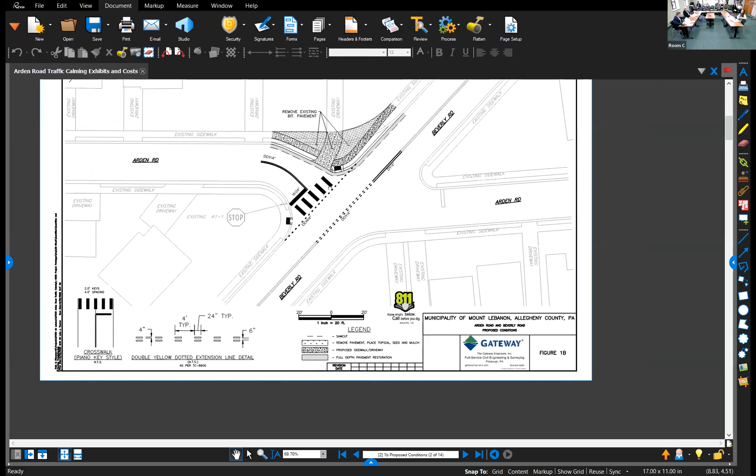We had this a little narrower and tighter originally when we met with Public Works. There were questions and concerns about garbage trucks and plow trucks going straight across, and that they would just cut over the curb like some other issues we saw on Sleepy Hollow years back. So this version is modified — we had just two narrow 12-foot lanes at the bottom, and we've added some feet so that right at the throat it's a bit wider, but still creates the need for a right turn.

At the top, this is the priciest part because there's sidewalk, driveway extension, curb, removal of some things, and a bit of pavement along the edge. Our opinion of probable cost for this is $65,000. Looking back at the Hoodridge and Rockwood project, I believe that one was about $65,000 to $70,000 — that also included some brick restoration, but that was three to four years ago, and costs are way up since then.

That's kind of an all-in estimate — we'd have to get some survey work done and do some design, so there's a bit of engineering and survey fee in there as well. For the sidewalk piece, it would be in the right of way, but maintained by the resident. Essentially throughout the municipality, sidewalks adjacent to the streets in front of houses are in Mount Lebanon's right of way, but as with every other case, it's the homeowner's responsibility to shovel and maintain it, as was the case with Hoodridge and Rockwood.

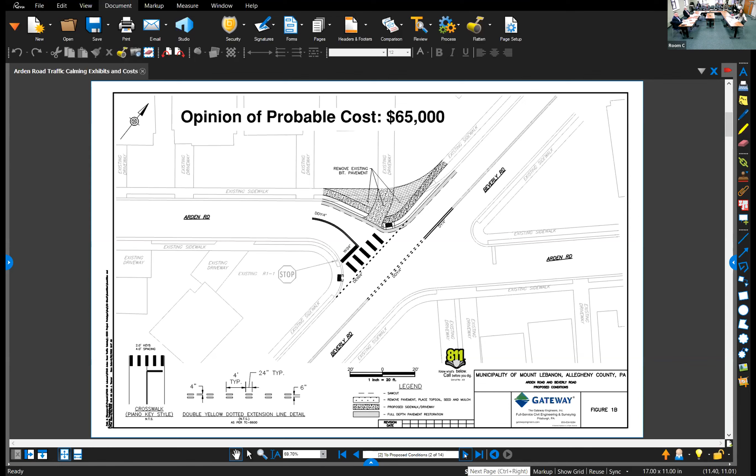So we proceed west on Arden up the hill. We get through the all-way stop sign with North Meadowcroft. And then we get to this section, which you should obviously know where this is. It's like mid-block between Overlook and the next one. Particularly including the house numbers, really - yeah, this really spells it out for you. It's like putting a puzzle together. But it's actually in front of right around 287 Arden Road.

So this is just your standard speed hump that you've seen in other places throughout the municipality that's being installed. Typical hump, it's 12 feet long, it's a parabola, it's not a bump like you would see in a parking lot at a mall. You can travel about 15 miles per hour over them comfortably. They're marked with signs and pavement markings.

We have to find areas where we've got roadway grades less than 8%, which we have here. You want it to be not in front of somebody's driveway, so with the driveways on each side, the spacing, we had to find a location where we weren't going to be impacting people's driveways, and also make sure the drainage would work. So this was a real good spot for it.

This was the location that was presented to the traffic board and to the neighborhood. That didn't really have any comments as far as the location. They were all pretty good, but it's pretty much midway between those two blocks.

So if you follow me from the beginning, we're slowing you down on the right turn, making that a little bit more uncomfortable for you. Then you try to gun it. And yeah, then you got the speed hump. Yeah, right, okay. Then you speed up and then you slow down at the speed hump, then you speed up again.

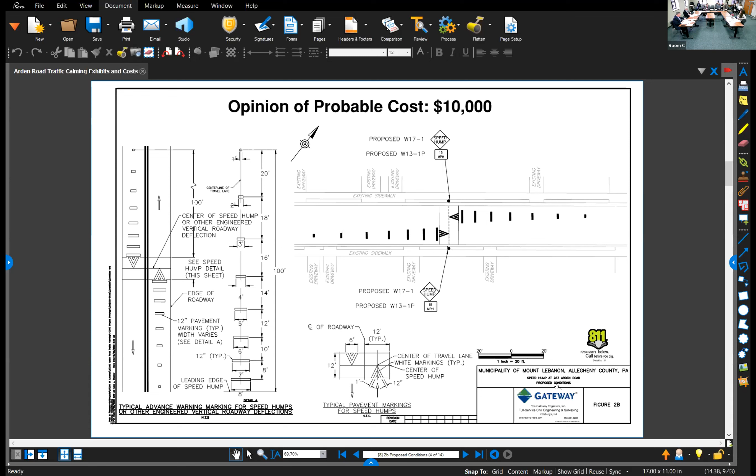That takes us to this kind of offset Overlook Drive Arden intersection. It might not be coming through on here in the existing conditions, but the alignment of it and the width internally between here is about 30 feet wide curb to curb. Once you get down further to the south towards the business district, it's your standard 22 or 24 foot wide. Same thing when you get up to the north. So there's actually a little bit of a skew in here on Overlook. It's not a straight through shot, and it's pretty wide in between these two crosswalks, and curb to curb is about 30 feet.

This isn't an all-way stop, but the stop signs are on the outsides. So if you're coming northbound on Overlook and you stop and you want to continue straight through, when you get to the northern side of Arden, you don't have another stop sign there. You're essentially navigating through the intersection. Same thing if you're using Arden as that cut through, you would have to kind of do a little bit of a jog through the intersection there.

This is manned with a crossing guard, a person with a crossing guard, during school hours. My understanding is that the crossing happens in the middle here, so kind of in that middle no man's land where you don't have a stop sign once you're in the intersection. But essentially it's worked well. This isn't a marked crossing, but that's where the crossing takes place.

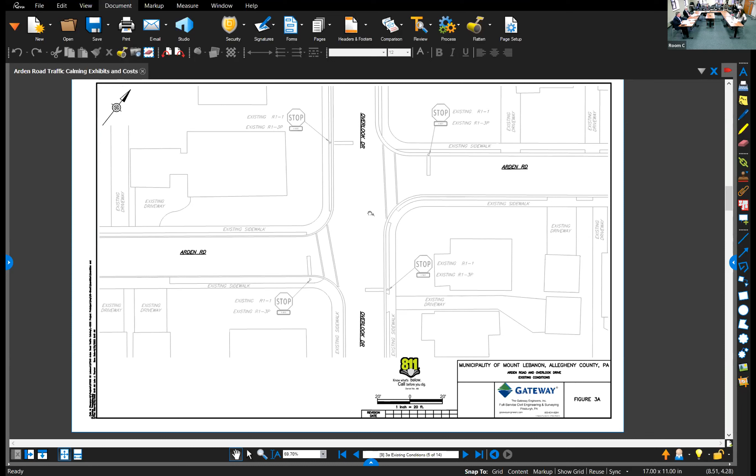This is one of the ones that we did a pretty significant modification to from the plan that was presented to the traffic board and the neighborhood.

We were originally trying to put in a concrete island in the middle as a refuge area, to take up some of that wide space and to delineate, to force more of a left turn and a right turn. Because what we saw on the video and data collection is that people were coming up, rolling through the stop sign at an angle and then shooting straight across at a 45-degree angle, and vice versa.

So they're not really making turns or making the movements, and it's in an area that's pretty heavily traveled with pedestrians, especially students. They're trying to avoid the lights on Beverly, trying to get from Cochrane to Beverly or vice versa. So they're taking every shortcut they can.

We're trying to impede them a little bit and calm them. And this is close to a business district—I know most of you know that. Beverly's right there, the business district just to the south of the screen here.

So instead of that, what we're proposing is to essentially create the same thing with markings—yellow markings, white markings, piano key crosswalk markings, dash double line markings. If you're in a vehicle, visually you're going to see where those dash double yellow lines take you, and ideally you're going to follow that. If you think about other areas where you have lots of asphalt and pavement, but you have pavement markings, you don't typically see people cruising right through the middle of them. They typically like to follow the lines that are on the road for them.

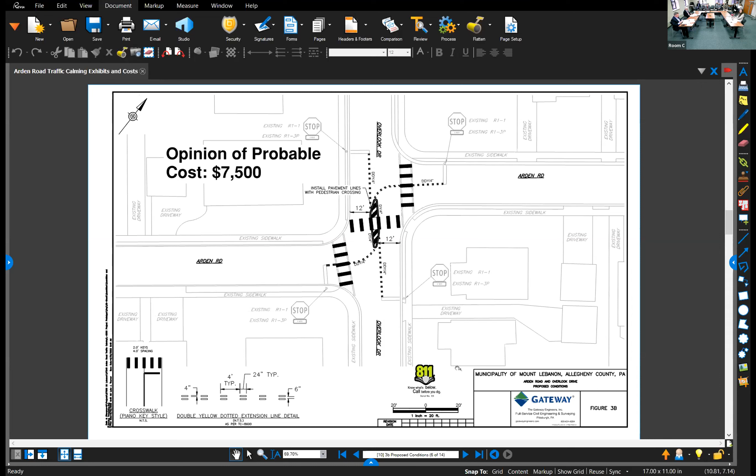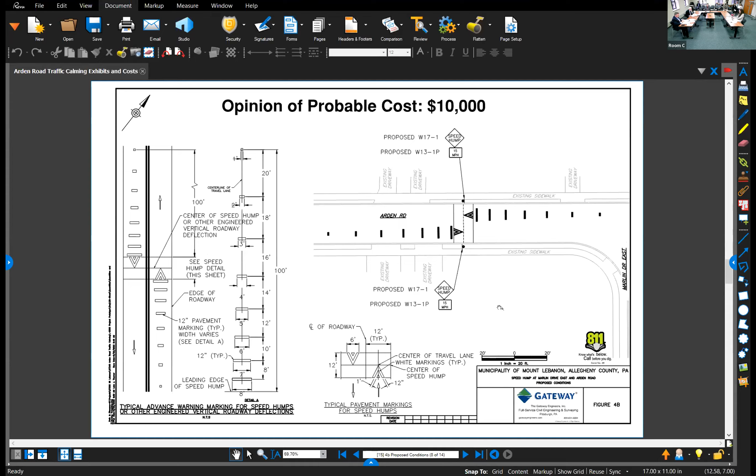So now you've hit the right turn, slowed them down with the speed hump, slowed them down through this intersection and with these turns. Now this is Marlin Drive East and Arden, existing condition there. We're proposing another speed hump here, same idea, 12-foot wide, a rolling speed hump—you can certainly travel over them comfortably at 15 miles per hour. An annoyance, yes, just another impediment along the way we're trying to create.

This one is right near the intersection, but the next one we're showing just before it turns to brick, between Marlin Drive West and McCann—this one is a little more desirable. There was discussion at the traffic board and with the neighborhood about whether both were necessary or needed in series. One resident was in support of one, but didn't want the other in front of their house, so we left it that it'll be one or the other or both—that's kind of an unknown at this point.

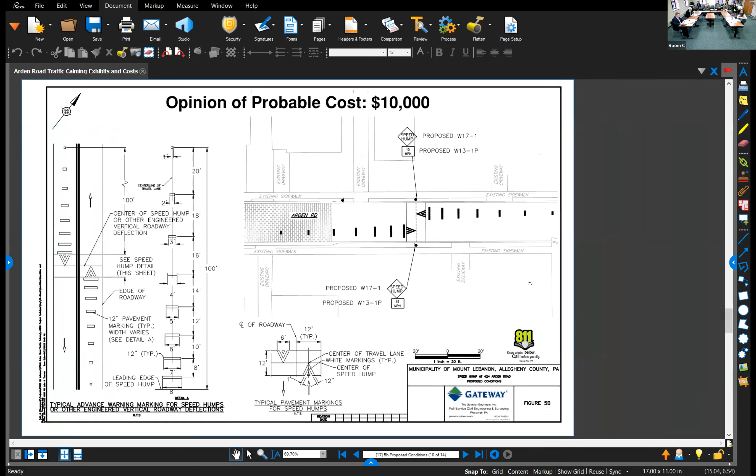This is the one I think makes the most sense. It's in a better spot with the vertical grade on this section of Arden. The other one up towards Marlin Drive East is a little steeper—it might be pushing the 8% threshold that we want to stay away from. We don't want to create a launch for people who are unfamiliar with it. It would also grab anybody coming up Marlin Drive East or West heading down towards Cochrane—we're capturing both of them with this one.

So if we had to have one or the other, this is the one I would recommend. That's not to say the neighborhood wouldn't have liked to see both, but they'd also be okay with one, and I think this would be the one.

So you designed and priced out 3 total speed bumps as part of the traffic calming. Correct. And you're saying if you had to do 2, you'd pick this one and the first one you showed us. Correct. Or we could do all 3. Or you could do all 3.

Thanks. I saw that there was just an accident at Arden Drive West. Yeah, Marlin West and Arden, sorry. Yeah, I saw some of those too.

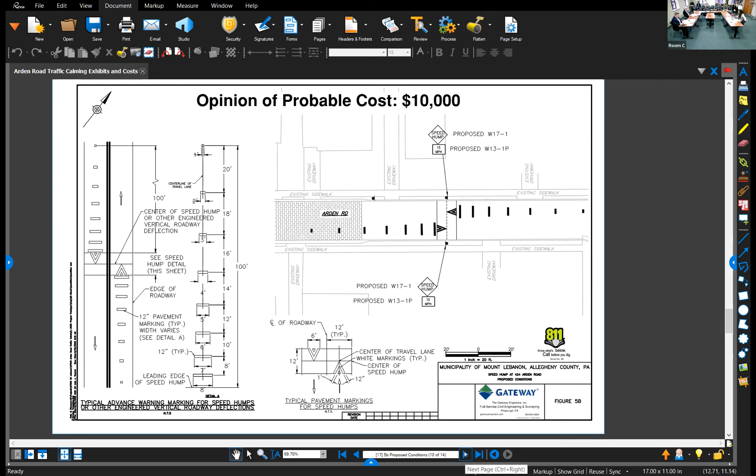So this one here would be, obviously you can see it's right before the brick section. There would be a little bit of pavement marking on there that would probably wear, but we'd be able to have them up on the hump and signs without really any issue there.

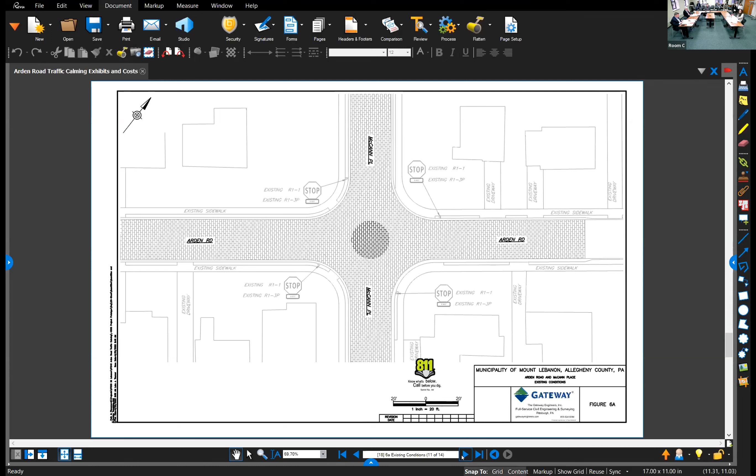And then this is the intersection of McCann and Arden. This is all brick. That dark circle is not supposed to show up on there yet, but it's an all-way stop control. This particular intersection is a big intersection as well. It's got relatively large radii on both sides. The road's a little bit wider than maybe the 22 or 24 feet. So you kind of have a big area in the middle here. So one of the treatments that's at our disposal is a traffic circle, not a roundabout, a little bit different.

A roundabout you're coming into without stop signs and you're entering and flowing out of it at your own pace. This particular intersection is already an all-way stop controlled intersection, but it's very wide. So what we're proposing, and what the neighborhood likes, is another little impediment internal to the intersection, so that anyone coming up on any of the approaches would have to kind of S around it to continue straight or loop around it to go south. Again, it's another 3, 4, 5 seconds, hopefully, that we're adding to somebody's cut through between the two roads that might force them or cause them to stay out on Beverly.

In PennDOT's criteria and guidelines, they say you should have at least 16 feet between curbs on these four corners. That's what we started with. So this is one of the adjustments that we made based on conversations with Rudy and issues with potentially plowing and then being able to get a fire truck through here. So we shrunk the circle a little bit.

It would be landscaped. We would propose the rolled curbs that you see throughout the municipality on the outside. So there is still even a little bit more room there with the rolled curbs for a tire of a fire truck or something that had to go over. The neighborhood says that they would maintain the middle of it and have a flower planting party once a year in the middle. It wouldn't be any high shrubbery or anything that would cause any sightline issues. It's really just another visual and physical impediment at an intersection that has a lot of space for it.

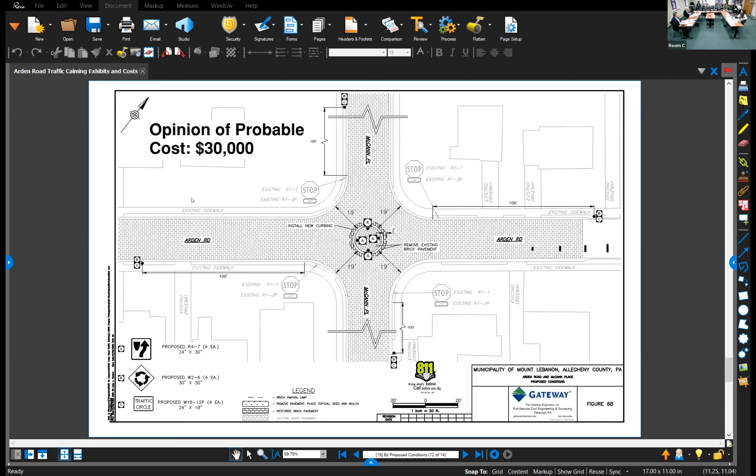And again, they're conservative - these turning templates are relatively conservative. But we are showing that it's within the curbs all the way through there, even though we are going to have a 1.5 or 2 foot wide rolled curb, so in theory there's even a little bit more space for tires. There's no barrier curb - that was one of the questions from the assistant fire chief.

Hey, you know, we don't want to be hopping curbs. We'll have some low clearances, so it's not a barrier curb situation - it's a soft rolled curb that a tire can track on. So that was the straight north and south, and then that was the east and west. That's why it went from 16 feet to 19 feet on the outside, and the circle got a little smaller to accommodate every movement a fire truck would want to make there.

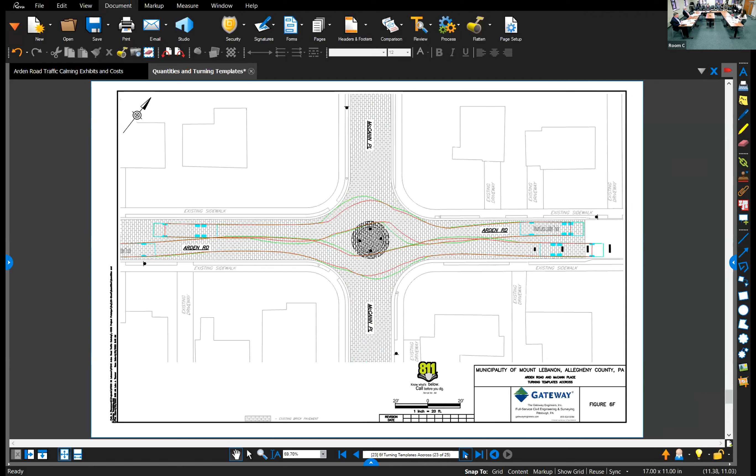And then last but not least of the seven, I won't go through all six again - we get down to Arden and Cochran. While this is not a significant movement, we did discuss it with the neighborhood. About 5% of the traffic does try to make, or does make, that left turn onto Cochran from Arden, which, as you all know, how congested Cochran can be there.

Probably not the safest left turn movement when cars are stacked in the through lane and in the left turn lane, and it's not a high volume. So we had talked about just restricting those turns during the peak time - 7 to 9, or 6 to 9 in the morning, and 4 to 6 in the afternoon, Monday through Friday. We also discussed making it a permanent restriction of left turns. I think the neighborhood, if I'm not mistaken, said restricted at all times. So that's kind of still floating out there as a decision that can be made.

I mean, the residents essentially said, we don't even bother trying to make that left turn. We have other ways that we would go to get down to Cochran. So whoever is making that left turn never said they were concerned about restricting it.

This exhibit's just showing a time of day restriction, but that could be permanent if that's what everybody wants, or the commission wants. And signs are just $500. It's just a couple of signs, like 4 signs. What's going to work best? We did something, and then 2 years later we want to change it.

So when you take all 7 of these treatments in series, the idea was we create enough impedance and enough inconvenience for the people using this as a cut through to just stay on Beverly. That's the goal. Cumulatively, we're hoping for a 10 to 12% reduction in the cut through traffic, or the peak traffic, or whatever volume we want to capture.

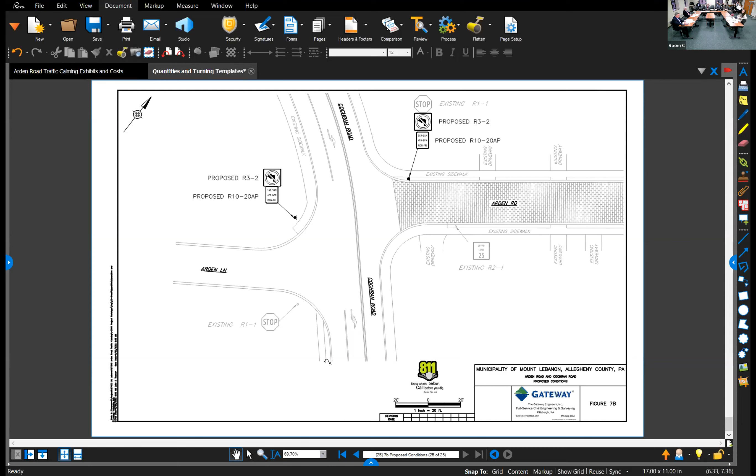The traffic circle, I like this one, I understand it creates a visual experience. But again, if it creates a visual experience for pedestrians also - when I'm in a crosswalk, I think I'm safe, but I'm not. And this is just creating more pain.

So again, these types of situations I think are a nice step, but not ultimately where we want to be. But that's my opinion. I will support this, but I hope we'll start to be more aggressive in thinking about how this network actually fits together.

Well, the question about paint versus a physical barrier - my vague recollection is there was some discussion about this being a physical barrier, but there's a problem. Was it the fire truck? Was it the garbage truck that couldn't get through with a physical barrier? Right, no trucks could go through - they wouldn't be able to make this movement. They could do right turns, northbound rights, southbound rights, southbound lefts, but they couldn't make that straight-through maneuver.

I agree with you, Commissioner Flynn, with the ideology. And I also know you don't want to piecemeal it and just look at Arden, because then we'll create a problem for Parker. If we make Arden the vision you have, which I agree with theoretically, as a piecemeal project we're going to create problems for the nearby corridors. But we'll look at all the streets together holistically - we collected data on Parker, Arden, Beverly, and where they all connect, so we know what was there before anything happens.

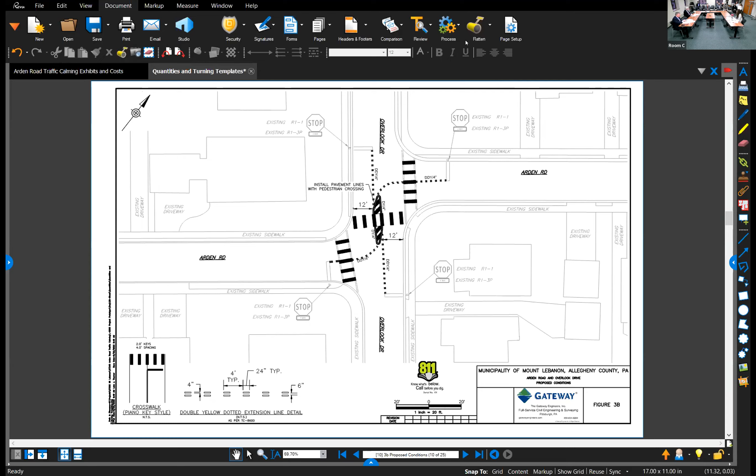Ending the discussion here would be good for me, because I'd like some time to hear back from residents in this area, since this is the first time they're seeing these revised plans, to see what their thoughts are, which will help guide where I stand. But I'm generally very supportive and really appreciate the work of everyone involved. Fantastic, Mr. Haberman, thank you for your work, and on behalf of the whole municipality, we appreciate all your efforts.

Thank you. All right, next up on the agenda, we have Mr. Milliron and Seth Davis of the EDC to talk to us about Complete Streets. This is a streets-full agenda. Let me turn my computer audio on for him here.

I'm glad I was able to wake everyone up for Mike's presentation there, apologize for that. Okay, had it pulled up now. Just give me a moment here. Speaking echoes, just a minute. No doubt. Okay, where did it go? I was looking for it today. I have to join the meeting again. Do we need to play the music or something? There we go, no, okay, I wanted to get that up.

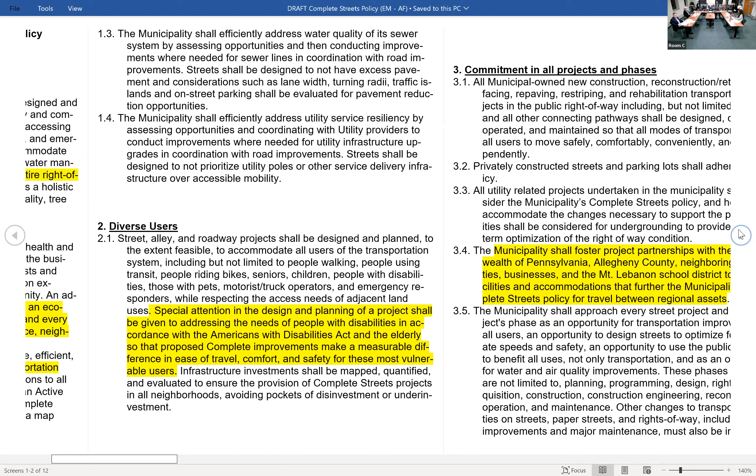Commitment in all projects and phases is the third section. This is where I wanted to pull out that the municipality would foster partnerships with the Commonwealth of Pennsylvania. I want to pause there because a complete streets policy, should the municipality adopt one, compels PennDOT to consider the fact that the municipality considers these issues of high importance. So when they come through Route 19, a complete streets policy gives us a tool to work with PennDOT for considerations that are best for Mount Lebanon.

So we can really join in partnership with the Commonwealth, but also Allegheny County. Allegheny County has made some bold efforts at moving forward this type of thinking and policy work. Then our neighboring communities - Dormont right now is actively pursuing something very similar, and they're doing some test pilot projects throughout their municipality in ways of traffic calming and making sure people are considerate of other modes. So there's real opportunity for us to work not just with the Commonwealth and Allegheny County, but maybe even more importantly with our next door neighbors, Dormont, Castle Shannon, and so forth.

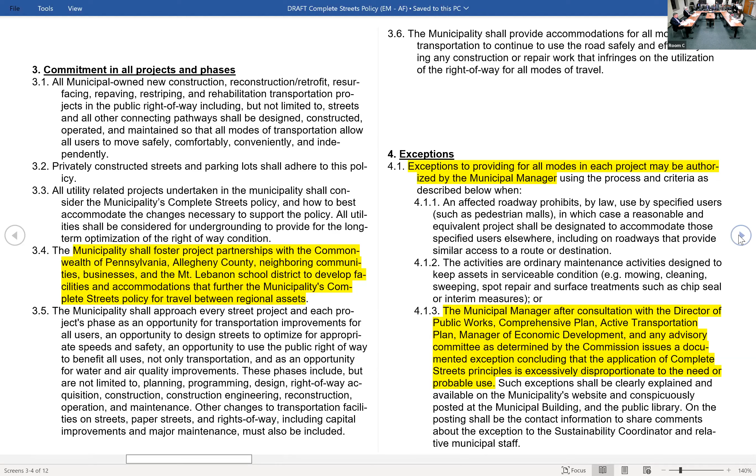Exceptions. We just had a little bit of that conversation. I don't want to delve back too much into that, but there are many considerations, and obviously public safety, costs, all of these things ought to be and need to be considered in any policy. So exceptions offer an opportunity for that pause, if you will, while considering various projects.

Jurisdiction, obviously it's Mount Lebanon, but again, this is just an opportunity for us to work obviously within our six square miles, but there's a lot of opportunities working with our neighbors, the county, the Commonwealth, and the federal government, all of which are committed to complete streets throughout the region. So this addresses that. I won't get too much into design, but it's in there basically to say we're using best state-of-the-art practices and drawing from the cream of the crop, if you will, of thinking when it comes to complete streets.

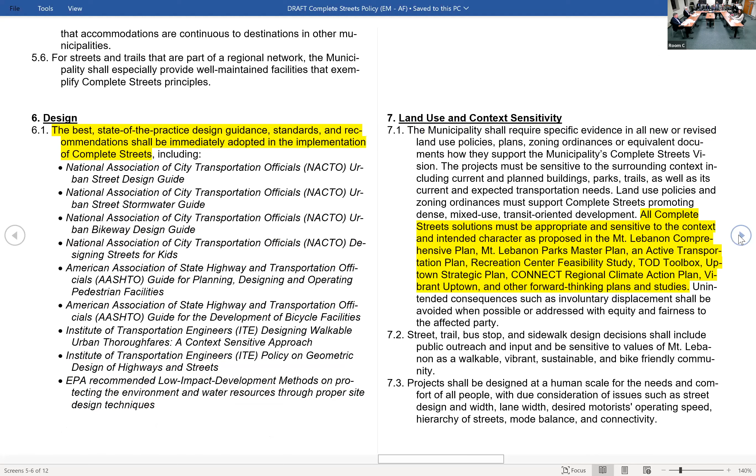I'll touch on the design just a little bit. What it does is it expands our toolbox. PennDOT has a lot of guidance and they've come a long way, but these documents show some interim steps. We kind of talked about stopgap on Arden Road - not a stopgap, but maybe it's an interim step. Hey, let's see how this works.

Or you consider rather than a concrete curb, there's companies - Zicla is one company - that makes kind of a rubber curb, and you can do some temporary installation to see how it works, see how the fire trucks run over it, see how our plows treat it. We've done temporary installations in North Meadowcroft, but a lot of this documentation shows some of those iterative steps, and you can study something, see how it responds. You don't get locked into concrete and other curbing right away while you see how it works out for the community, our DPW, or other groups within the municipality. So a lot of this documentation points you in that direction.

Could you do a temporary traffic circle? Yeah, I mean - really? I can't specifically say, I know, but we can. Yeah, we can do something. Yeah.

We're not gonna get to do guerrilla roundabouts. Not that I haven't thought of it. But I have thought. So, but also in design, I'm talking because I think it's the easiest to communicate in a limited amount of time.

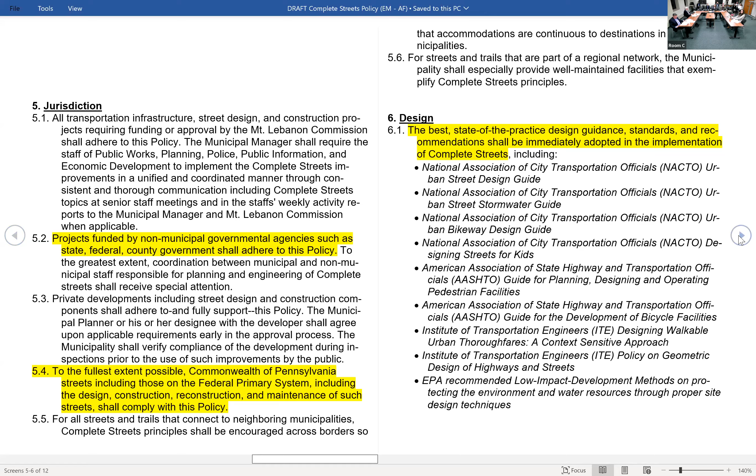But there's also stormwater issues that can be addressed, so dialing back to design. The last bullet point is the EPA recommended low impact development methods. This concept is gaining some traction, and one of the core members of our team working on the policy wanted to make sure we had at least some language discussing low impact development methods as a way of mitigating stormwater issues, which we're all unfortunately too aware of.

Land use and context sensitivity - taking a look at solutions that are in the context of our community. The comprehensive plan is one of those, but we also have the Parks Master Plan. Complete Streets is looking at the entirety of the municipality and how people get from point A to point B in the best possible way. So looking at all of those various plans, and then we're going to be talking about an active transportation plan. We don't have one, but should we take this step, that would be more than likely the next step.

Like any good policy that's really trying to actually do something, you would want to have some performance measures. So there's a number of them here. I highlighted ones that we're either actively pursuing or already doing. But I know right now we're in the midst of installing and considering more EV charging stations. Okay, that's great - so we have 5 this year, next year we have 10, and so forth and so on.

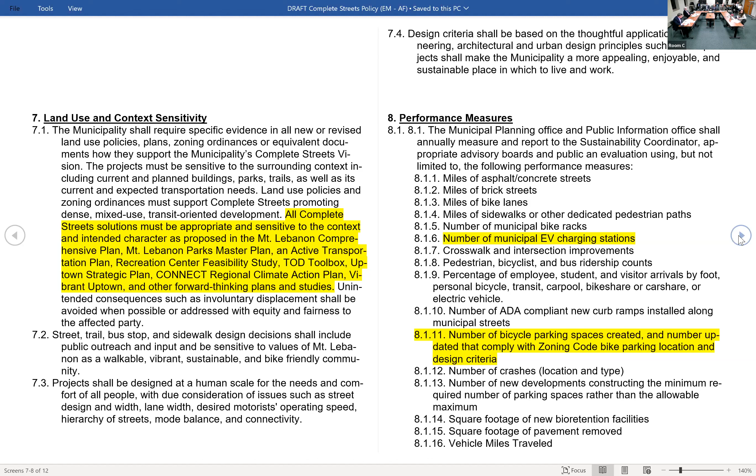So that's a measurement - bicycle parking. Right now we have a smattering of bike racks in some of our commercial areas, in Beverly, Washington Road, and one in front of Hitchhiker and Luma. But we could probably do better than that. So that would be one metric. But you can see here, there's a number of other ways to be sure that we're doing the best we can to live up to the spirit and intention of this policy.

So project selection and criteria - using this as, I can't remember the exact word Seth used, but yes, the North Star, thank you. Our North Star Polaris document, while we're looking at various capital improvements, so that we're considering all of these various factors, whether it's public safety and various mobilities, stormwater, all of these sorts of issues, while we're working into that.

And then implementation steps - there's a number of points there, but the one I wanted to bring up was really what I think the team considers to be an important next step, is pursuing an active transportation plan. And just, sorry to steal your thunder, but the reason it's codified that way is that actually comes from language from PennDOT. Complete Streets, the policy and process and approach are the first step. But when we go to seek funding, because funding is always a question, PennDOT's looking for an active transportation plan. The county is looking for these things for grant funding, other funding cycles. There's new federal formula funding for considerations like this.

So even Alcosan has the GROW grant program. We already are doing stormwater - we're undergrounding systems. I used to serve on the Dormont Stormwater Authority, so I know how much those cost. Hence, we're potentially raising a stormwater fee. So you create this active transportation plan, so when we start to dig up a street, hey, this was a priority movement street for X, Y, Z. Let's think of these other considerations and maybe go after a larger funding piece or seek ways to augment our capital budget and other funding mechanisms. So it brings it under a lens, it codifies something, it gives you something to work for, which we don't have right now at this juncture.

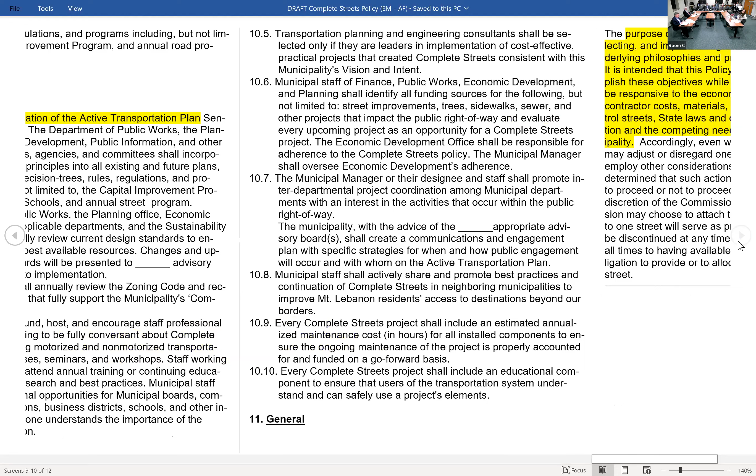And then general - again, this is language, the purpose of the policy is to assist the commission in evaluating, selecting, and implementing options relative to streets by outlining underlying philosophies, so forth and so on. So again, the policy - things change, and there are various factors that need to be considered. As the commission well knows, every budget season and every day, there's competing interests, competing resources, and things of that nature. The overall arching goal is to shoot towards that North Star, but there is language that allows some flexibility.

Moving forward should a policy be adopted, so that's a very quick Cliff Notes version of the policy. That's why I'd like to offer it back for your beach reading or whatever we do in the leaf peeping reading, and digest that, because I'm sure you may have additional questions or concerns that we would be happy to address. So the next step is an active transportation plan in our mind, should this be adopted. And Seth, you just want to take a second and explain what's an active transportation plan?

And we've touched on it a little bit, but it's the nuts and bolts. This process and approach rolls into our plans, rolls into divisions of the municipality, and people begin to consider it. We educate our staff, team, and commission on what complete streets are, so you can be conversant in it. But what the active transportation plan does is it creates the nuts and bolts of how we execute this plan, how we begin to implement parts of this policy so we respond in an equitable fashion.

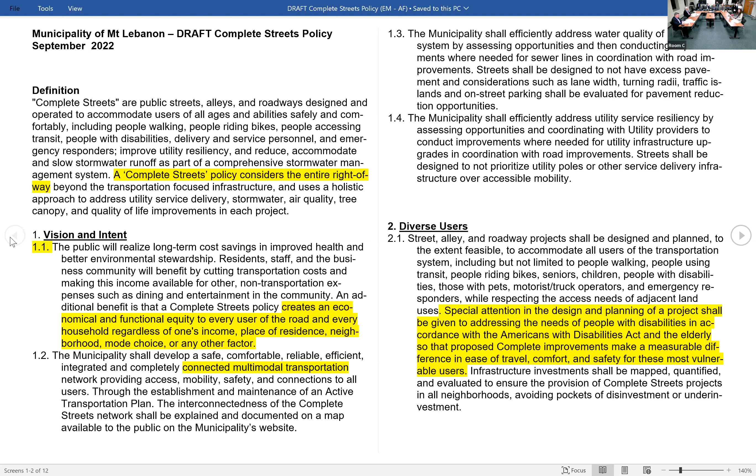Gentlemen, I obviously, as you know, I'd love to keep this conversation going, but we only have so much time. The work that you guys have done has been absolutely phenomenal. And I definitely encourage commissioners to read the policy and ask questions, propose changes. We will vote on this year. I am sticking that flag in the sand. There isn't a date yet, but we will be voting on this.

Yes, and obviously I would look forward to everybody's full-fledged support, but I know that we need to get there. So first step or next step is for us to read this in detail and make sure we're either comfortable with it or proposing changes. I do agree 100% that there is no funding behind this. This is step one, right? This is a policy. This is not digging anything up.

This is not changing funding. This is about establishing the North Star that sets us on a path that gives staff the tools necessary to start making decisions in different ways. So whether it's public works or it's public safety, thinking about how equipment moves or how pedestrians move, or anything in between, this is a framework within which we can start to think differently and approach these challenges systematically, which is really important long term.

So again, thank you, gentlemen. Truly appreciate all the work you're doing in socializing this and bringing this together, and obviously more to come.

Commissioner, if I may, before we jump off, Tony, you see by my scribbles and notes here, I was doing some reading, fly specking.

Call it semantics, but as I was reading through this and seeing a lot of 'shall do,' 'shall adhere,' it felt more like mandated action than guidance, spirit, and North Star. Maybe that's just the legalese here, but I don't see a lot of it being flexible, and that was a concern I had going through this.

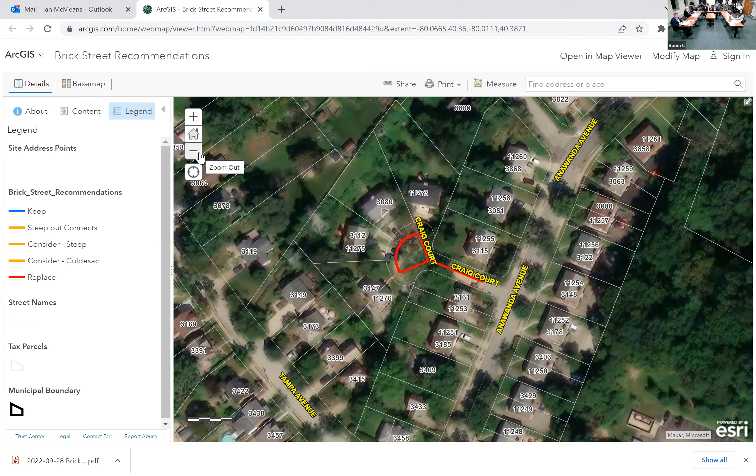That road has actually come up on the reconstruction list in the last couple of years, but we've not been sure what to do because it's brick, and we haven't done anything with it at this point. So that would be one that, due to its location and its relative separation from anything around it that is brick within the neighborhood, was kind of that dead-end cul-de-sac case.

I guess I think of dead end almost like cul-de-sac. Yeah, me too. I just didn't know why dead end would matter, but now I kind of get it.

The other dead end I'll mention is this one on Academy Place, which really doesn't connect to anything. Salem Drive coming up through here is all asphalt. It's just this little leg. I guess, does this house have a driveway coming off of it? It does, yeah. Some of them seem like forgotten pieces of brick over the course of time, like the main road was completed and then this was left behind.

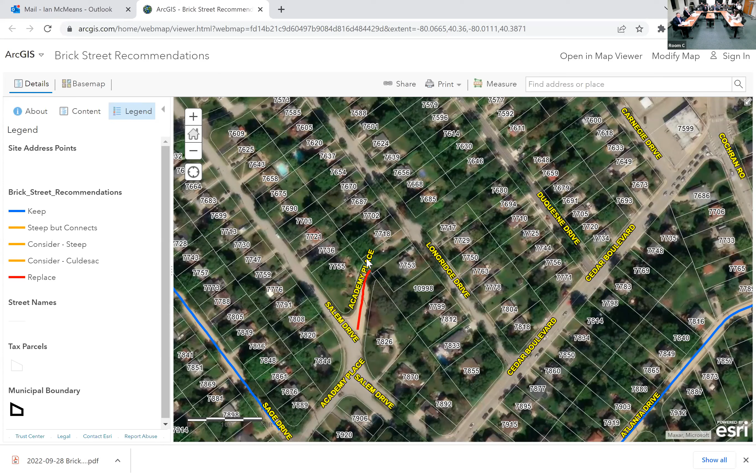Right, because there's the right of way through here that was never actually completed or developed, so it's basically a paper street. It was built out to just one block as brick and then just kind of left there.

So that was one we said, okay, it's steep, it just serves a couple houses, things like that. But then some of the other ones, like Commissioner Silverman mentioned, Martha, we put on our further consideration list because I know from talking to the people that live on Martha, they love having a brick street there. So that was one where staff was kind of like, it's flat, it's in the historic district, but it's one of those things where when you're looking at how much bang for your buck you're getting, it's one of those ones where you're only serving a couple houses.

Because as we've established with our previous memos and things, there's a significantly higher cost to replace with brick than there is to replace with asphalt. So at that point, there's some consideration for if it's disconnected from other streets, if it's relatively low impact, how much money does the commission want to invest? And that's a financial decision for the commission to make.

Whereas this section of connecting road is part of this whole network of brick streets back through the whole neighborhood. Interestingly enough, if you look back at the old Mount Lebanon map from like 1930 something, this is the limits of the streets that were built at that point, and then the next section of main entrance was built at a different point in time. But nevertheless, that's just an aside from the planner.

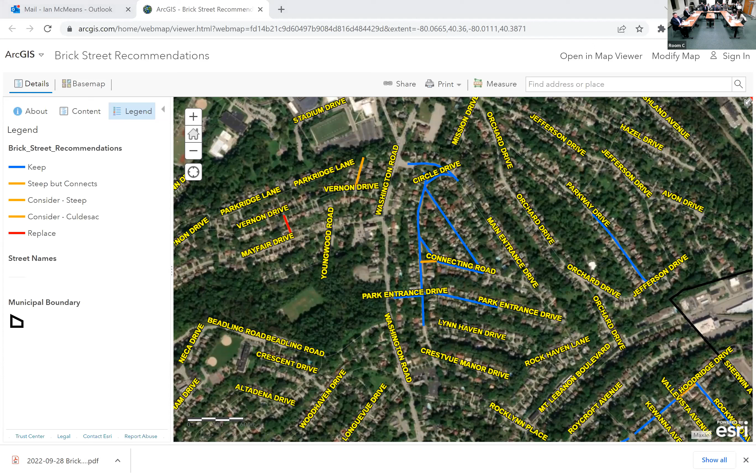Yeah, so Ian loves those. The four streets that are on that dead end cul-de-sac, Martha, Birch, those are kind of just somewhat isolated off by themselves. And the Birch section was just from Hill to the dead end. It wasn't because the rest of Birch is pretty flat, but it was just the question of the Hill to the dead end section.

And that was also a question of Hill being a steep street. We've already done half of it in asphalt. Do we want to keep the other half as brick? It is steep, do we want to convert it to asphalt? Adeline and Birch are both brick as well, so there is some interconnectivity there. So that was kind of a question of how do you make a consideration on a neighborhood scale there, do you keep it, do you replace it? That's kind of an open question for further consideration by the commission.

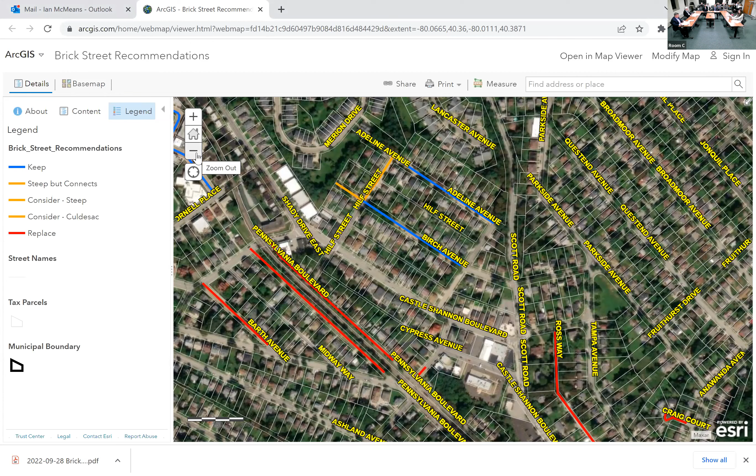And Mr. Bagley also put together a fairly lengthy presentation that runs a bunch of numbers and financial analyses on all this stuff, but we obviously don't have time for that tonight. We're happy to pass it on to the commission and come back and discuss it further at a future meeting. But this was a deliverable that the commission asked for out of the last public discussion session in July, to come back with a list of streets based on the criteria the commission had established. So this was our first pass at that list of streets.

I have to say that this has been really helpful for me. I think, frankly, your first pass was smaller than I anticipated. The blue, what you said, it was like 7 something miles. 7.5, yeah, 7.5. And the orange is how much? About one. About one, which is fantastic, right? That gives us a sense of the range we're working in, in terms of committing to this as a long-term program.

Obviously there's some details here that I think we need to dig into and have some discussions on. And I think each commissioner is going to look in their own ward and probably dig in the weeds and make sure they're comfortable with it. But overall, I'm much more comfortable with this now looking at this than I was just with the numbers, knowing that we needed to start with just the numbers to get a sense of scale and general price tag. But I think this is a nice step, and for me, as it stands, my ward, I'm good with keeping the blues and everything else can go.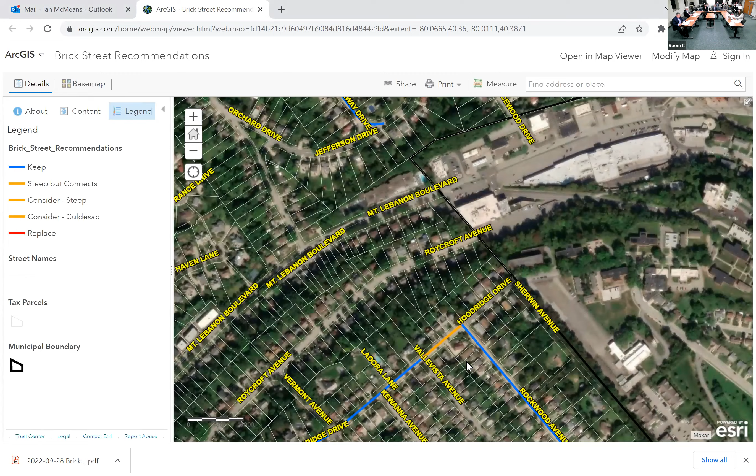Within those yellow and orange streets in my memo, I broke them out into certain steep slopes that we thought should be preserved, like that section of connecting Hoodridge Drive that connects between the brick on Hoodridge and the brick on Rockwood. That section is steep, but it makes no sense to replace it with asphalt because it's connecting - it would just look awkward from a neighborhood standpoint.

So there were 9 street segments that were kind of in between, up in the air - those steep ones for further consideration, and then those cul-de-sac dead ends: the dead end of Beverly, the dead end of Birch, the little section of Iroquois down by the bottom that has asphalt on both sides with just one little section of brick, and the dead end of Martha - the 4 cul-de-sacs.

And then the 5 steep slopes for further consideration was that section of Hilf I mentioned, a section of McCully, Nakoma, a partial section on Royce, and Savannah. Nakoma actually has 2 steep sections, one at either end of the street.

I hate to cut this short, but we are at 8 o'clock.

So to summarize, those 9 I just mentioned were really the wiggle room, based on my memo, which was based on the commission direction from July, where we were recommending like 8 miles between regular preserve as brick and those other streets - 8 miles, give or take, to preserve. Well, I thought it was 7.5.

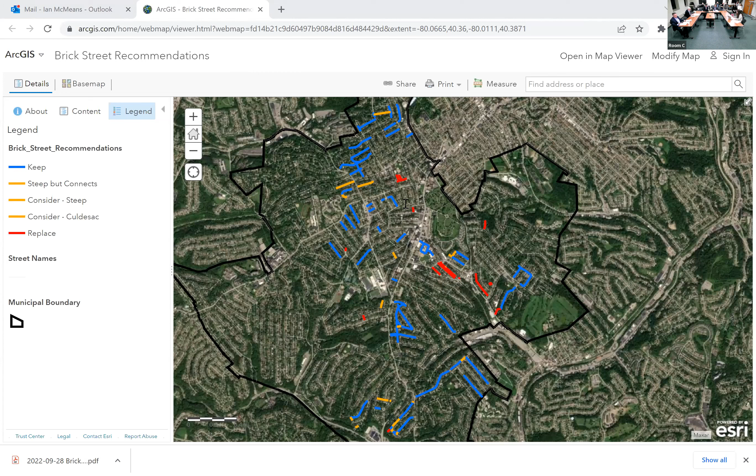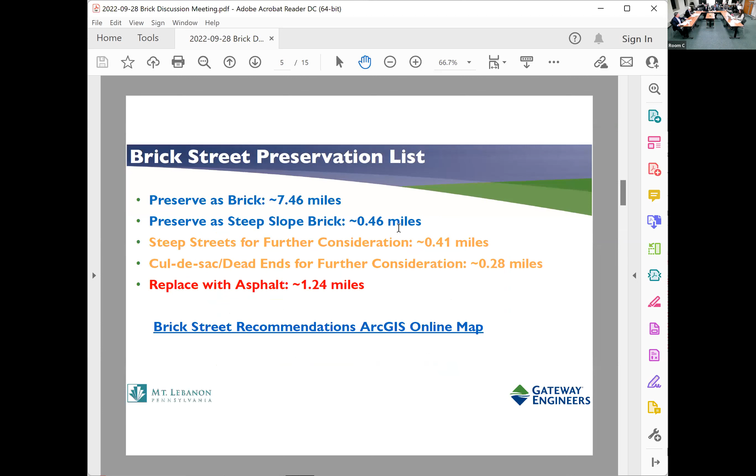Let me go back to the steep slopes to preserve - it's 0.46 miles. So even though they're steep, we're saying they should be preserved, just because they are linked to a whole neighborhood of brick. So it's really that 7.46 plus 0.46 that we're saying is the blue, in essence - that's 7.88 if I've done the math right.

This preserved steep slope actually appears as yellow on the map also, so that was why we said the 7.46 was preserved as brick. This additional 0.46, give or take 0.4, is the steep slopes we said to preserve. And then the 1.4 based on the commission direction of steep slopes, alleys, things like that, was the 1.24. So that really just leaves that 0.6, 0.7 to talk about later.

Oh thank you, that makes me even better - so more like 7.9. Cool, awesome, for the lower number, sorry. I know, that's our discussion. That's perfect, that's where we'll be.

Next time, at some point, I'm going to need clarification in terms of, when you talk about PCI of 70, what's the cost annualized? Is that a PCI annually for all streets or just specifically for certain ones? No, all streets - if we think about it from a network perspective, what's the cost differential if we just make this incremental change on the orange, or just preserve the blue? I want to be able to tie this in with our budget conversation.

Because ultimately what I'm trying to do is just say, look, I want to treat streets as streets. There are brick streets that are treated specially - we understand that, we've made that determination. But I'm looking at a street budget, period. I'm not looking at a brick budget and an asphalt budget. It's streets - what's the total number?